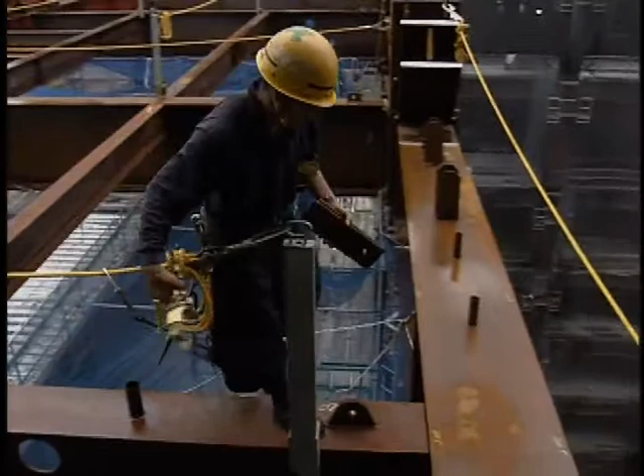They seem to defy gravity. Forged from concrete and steel, skyscrapers loom over today's urban jungle. They embody the souls of those who built them, the strength and courage of high steel workers, but also the danger of such a passion. For as gracefully as they rise, skyscrapers collapse with unparalleled devastation.

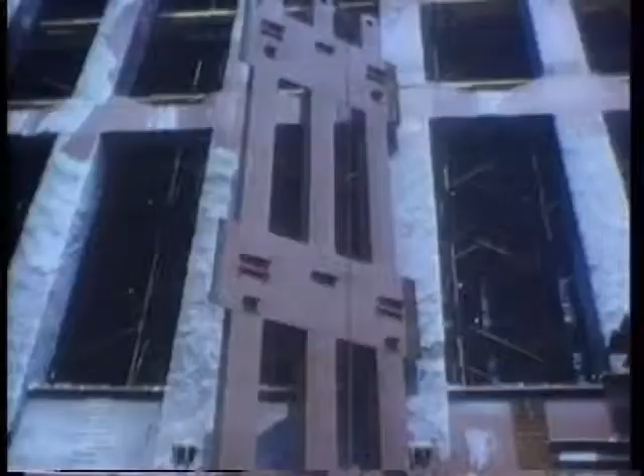Yet in the face of potential disaster, architects continue to design these superstructures higher and higher. It's become a race towards the heavens to lay claim to the title, tallest building in the world. How far and how high will this never-ending race take us? And what engineering marvels keep these superstructures standing?

In Nagoya, Japan, despite continual rainstorms, work progresses on one of the world's largest skyscrapers. The JR Central Towers, still in its infancy, is being built in the middle of a crowded city and on top of a busy train station. Every facet of modern engineering skill is daily put to the test.

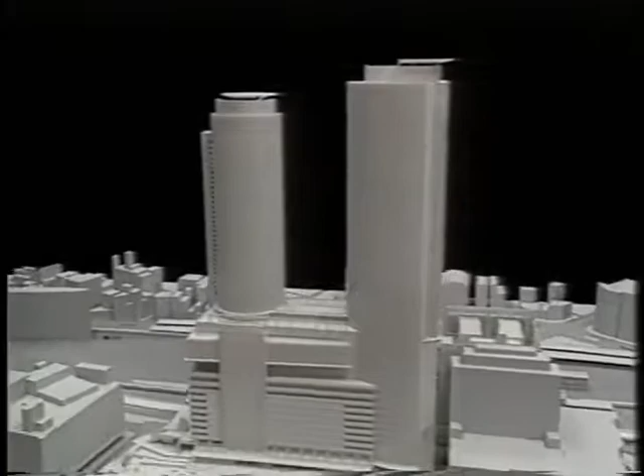When completed, this enormous skyscraper will encompass over 4.5 million square feet. It's about the size of the Pentagon, or larger than one tower of the World Trade Towers, the Twin Towers, and one of the largest buildings in Japan, if not the world. Engineers in Nagoya, like many throughout Japan, have no choice but to build up. Land is scarce, and real estate prices are soaring. To meet the needs of a growing population, skyscrapers are the only answer.

In the capital of Malaysia, space isn't an issue. Land for construction abounds. Yet in Kuala Lumpur, a modern 1,400-foot skyscraper is being built. The Petronas Towers are an amazing structure of glass and steel. With 88 floors and 100-foot spires, these twin towers are a monument to architect Cesar Pelli's dreams.

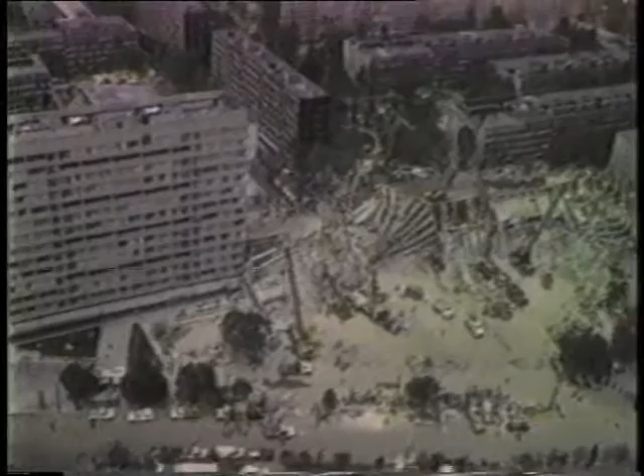Whether built out of need or inspiration, constructing these mammoth skyscrapers relies heavily upon technological advances. But modern science isn't perfect, and tragedy follows when one comes tumbling down. Unwavering before such catastrophes, engineers continue to build bigger and taller superstructures.

Well, I think man has always wanted to get higher and higher. He always climbed the mountain to see beyond. It's also getting up to be taller, to overlook everyone else, or to be recognized, or to feel more powerful.

To build these modern-day monoliths, architects and engineers first had to conquer the force of gravity. During the mid-1800s, the only means of vertical transportation, other than climbing stairs, was a rope and pulley system driven by a steam engine. However, the system was too dangerous for passengers since the ropes often broke.

Frustrated, Elisha Otis invented a safety brake that locks the platform to its guides. In 1852, what seems a minor invention paves the way for the modern elevator. Slowly, the public begins to trust the Otis elevator. Upper-level floors become fashionable and profitable as architects quickly adopt this new means of vertical transportation.

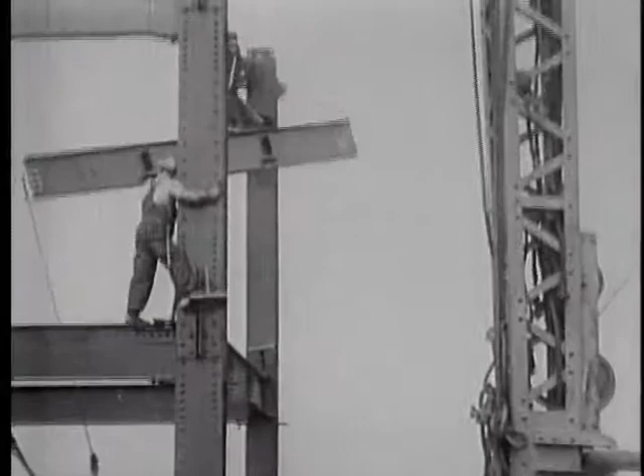Even with the use of an elevator, buildings rising above 200 feet remain a dream. The building materials of the day, bricks, stones, and mortar, are simply too heavy to allow great heights. But in 1885, with the invention of the steel cage structure, the modern skyscraper is born.

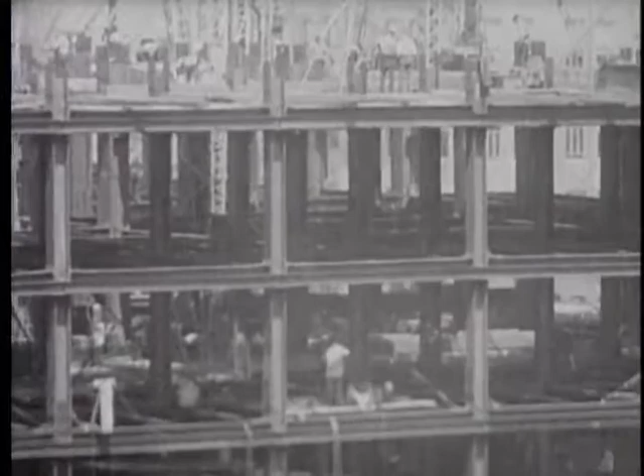Rather than build up from the ground, they built a cage inside, like a bone structure, a skeleton, and then they put the skin on the outside. The weight of that material is held at each floor level rather than passed all the way down 5, 10, 20, 30 stories to the ground and held at the bottom floor. No, it's all hung off of this very strong structural cage, which is much lighter now because it's made of steel.

Because the steel structure bears the majority of the weight, the exterior, or skin of the building, can now be made of much lighter materials, such as glass and aluminum. The result is an explosion of buildings taller than anyone has ever seen.

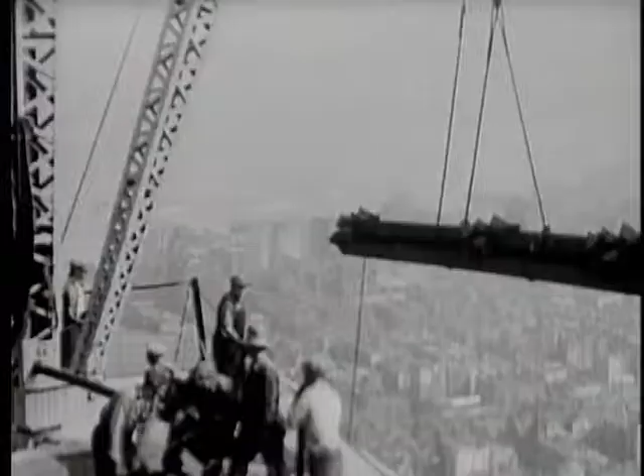The limits on masonry buildings were about 200 to 250 feet, equivalent to about 20 stories. With the advent of the separation of the two systems, the skeleton from the skin, we became capable of pushing higher and much higher, up to 50, 70, 80, or the Empire State Building type, up to 100.

For over 100 years, the steel cage structure has enabled engineers to build skyscrapers higher and higher. It's the backbone of every tall building's design, even the 800-foot JR Central Towers in Nagoya.

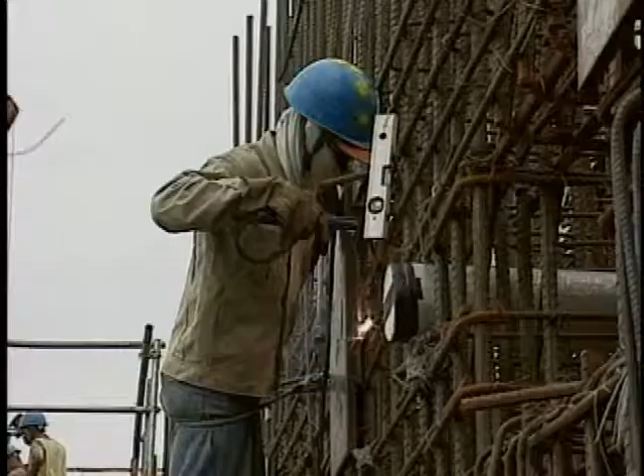The skyscraper is made up of 3 steel cages. One forms the base of the building, while 2 rise up within each tower. Without this technology, skyscrapers rising above 20 stories wouldn't be possible.

In Malaysia, over 26,000 tons of steel and 160,000 cubic meters of concrete have been used in the framing of the Twin Towers. These 88-story steel and concrete skeletons will help the Petronas Towers claim the title, tallest building in the world.

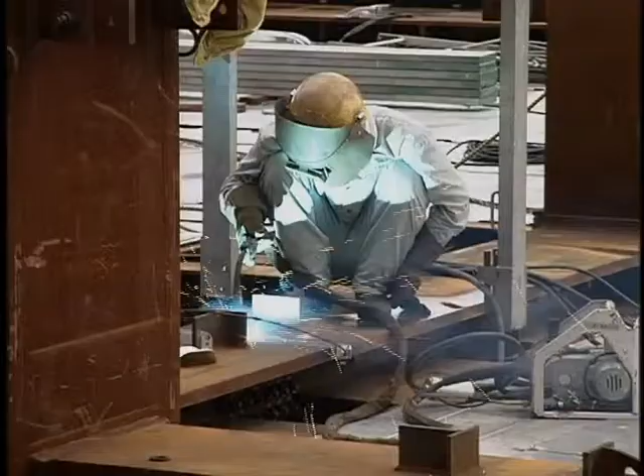Higher and higher they rise. But at what altitude do skyscrapers become too dangerous? Over 50 years ago, a deadly incident magnified these risks.

In 1945, the tallest building in the world is New York's Empire State Building, rising an incredible 1,250 feet. Built in just over 13 months, its claim as the tallest skyscraper will last nearly 40 years. Perhaps this building's greatest achievement is not its long stay at the top, but its jarring reminder of the dangers of building so high.

The Empire State Building and all New York City were wrapped in fog as a B-25 Mitchell bomber trying to reach a nearby airport crashed into the tallest structure in the world. Although the pilot and 13 others died, the building sustained little damage and was open for business 2 days later.

Its ability to survive a collision with a World War II bomber seemed to validate modern engineering technology. Soon, a skyscraper building boom swept across the United States.

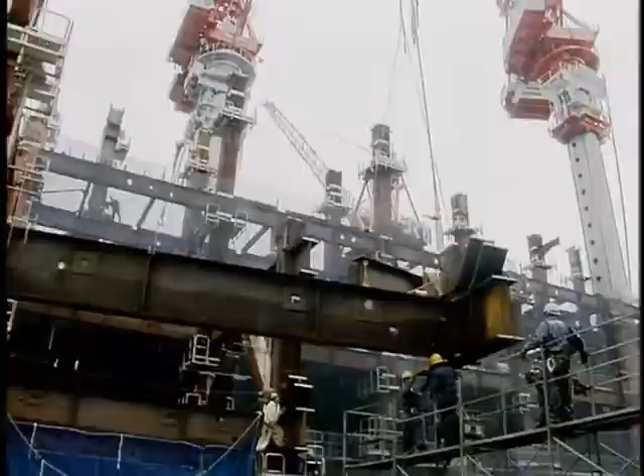The competition is as fierce as ever. You built a skyscraper, they're taller and taller. Some of them make absolutely no economic sense, but they're being built nonetheless. It's just amazing the number of projects that are being done out there. They're being done strictly for ego. There's no other reason, and there's no economic reason for them to be built other than sheer ego.

As this construction craze of enormous skyscrapers spreads throughout the Pacific Rim, the engineering world is once again thrown into a battle to become the world's tallest building.

The Petronas Towers are planned to top off at 1,476 feet, 22 feet taller than the Sears Tower. Only time will tell if this architectural pursuit will prove deadly.

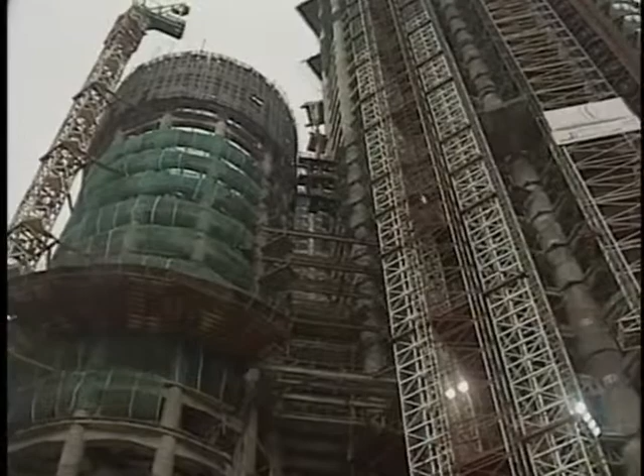In New York, to avoid future collisions, airplanes were simply rerouted. But the engineers of the JR Central Towers and the Petronas Towers are threatened by unavoidable forces.

They're building skyscrapers in one of the most seismically active regions in the world, where the threat of a major earthquake is constant.

Relying on the innovative designs that enabled the Sears Tower and the Empire State Building to reach such monumental heights won't help. They weren't designed with earthquakes in mind.

How safe will these new structures be when a violent earthquake shakes their very foundations?

As construction continues on the JR Central Towers, the Petronas Towers nears completion. Engineers of both buildings hope their state-of-the-art technology will pass the test.

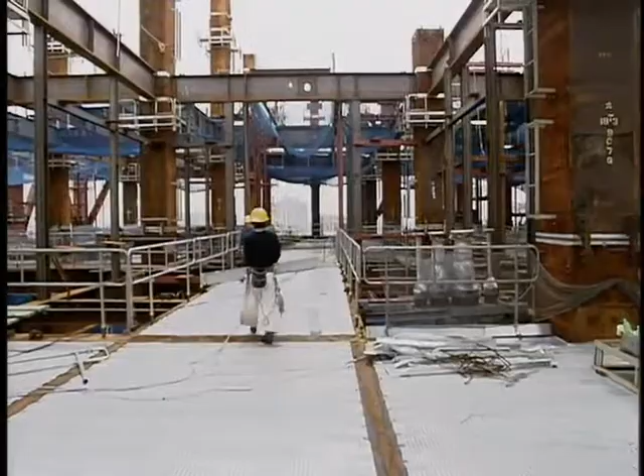If it fails, these latest additions to the tallest buildings in the world could come tumbling down. Modern building design will be pushed to its limits when Mother Nature strikes.

The construction of the JR Central Towers is a collaboration of the top engineering minds in both Japan and the United States. It's also one of the most hazardous projects in the world.

Located directly below the site is Nagoya Station. 1.5 million people pass through here each day, disregarding the huge skyscraper being built above them. But what would happen if an earthquake hit such a densely populated area? It's happened before.

September 19th, 1985. A killer earthquake registering 8.0 on the Richter scale rocks Mexico City.

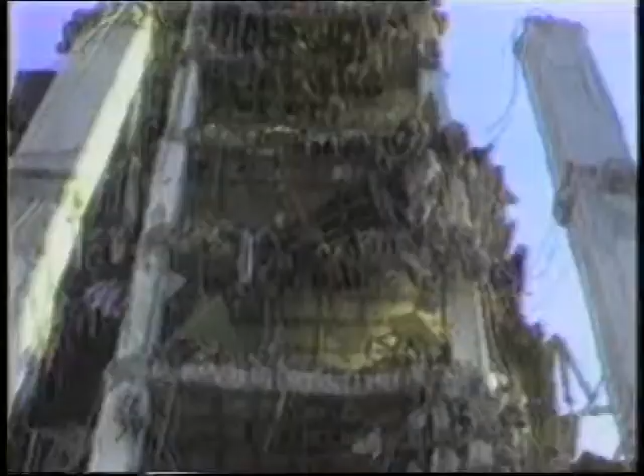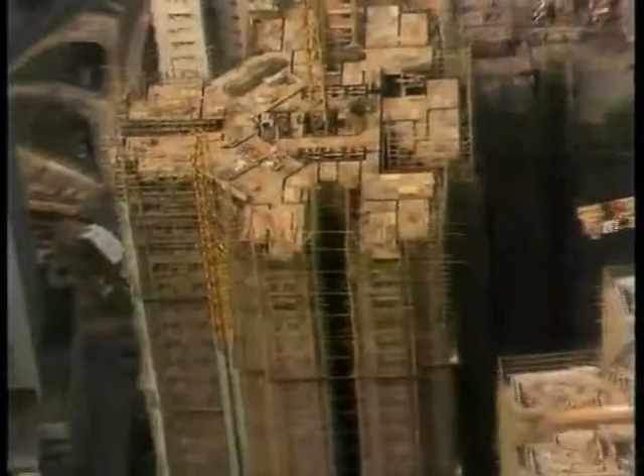More than 10,000 people are killed, and over 100,000 are left homeless as the quake damages nearly 3,000 structures. 400 totally collapse. And for the city's towering skyscrapers, once a symbol of modern Mexico, this is the most devastating quake ever.

The ground was actually moving back and forth for a minute and a half or so, about like this. It was just a gentle motion back and forth. And certainly most buildings, if you were in them, you'd get a little seasick, but you wouldn't feel very much. It's not a very violent motion unless you happen to be a tall building.

During the 90 seconds of shaking in Mexico City, some skyscrapers swayed 6 feet, 3 times farther than what is considered safe. Neighboring buildings slammed into each other, causing major damage.

10 years later, a small office in the Japanese city of Kobe is tossed upside down, just one of the many casualties in a town devastated by a 7.2 earthquake.

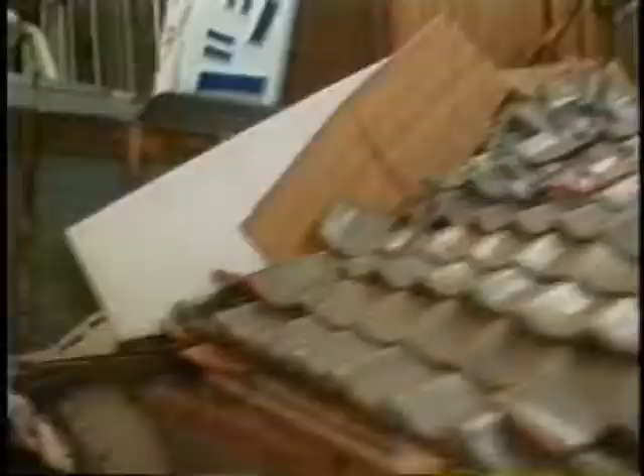Over 100,000 buildings are destroyed. Another 80,000 are severely damaged. And in downtown Kobe, home to most of the city's skyscrapers, 60% of the buildings sustain significant structural damage. Over 20% are completely destroyed.

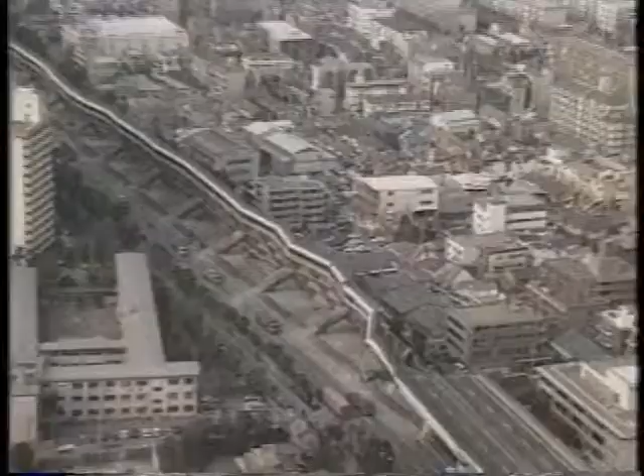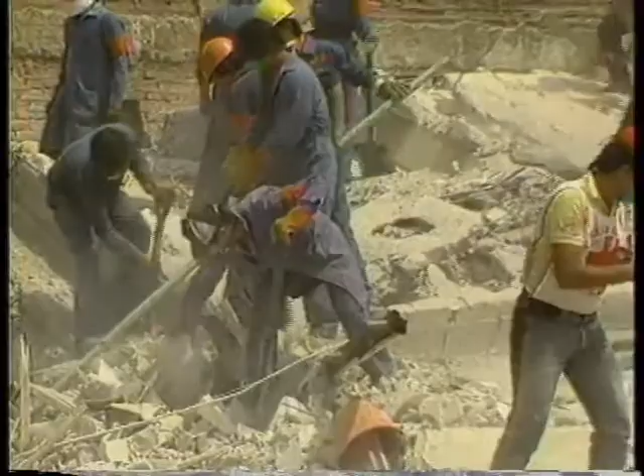It's in this seismic environment the latest skyscraper building boom has erupted. Whether guided by sheer need or pure ego, architects are designing some of the tallest buildings in the world on some of the most unstable land. But the devastating failures in both Mexico City and Kobe have provided the building community with valuable insights.

When the Earth moves beneath these monoliths, the skyscraper's center of gravity becomes offset. The top of the building tends to lag behind the base, putting more stress on the columns. At the very least, the building could end up with a permanent bend in it, yielding an economic total loss, although the occupants may survive. The worst case would be that it got so far out of vertical that it actually fell over, and that, of course, would be a catastrophic situation.

Using computers to simulate the shaking a building sustains during a major earthquake, researchers discovered that strengthening a skyscraper's foundation may prevent these structural failures. In Nagoya, Japan, only 140 miles from Kobe, the engineers of the JR Central Towers are putting this latest research to the test.

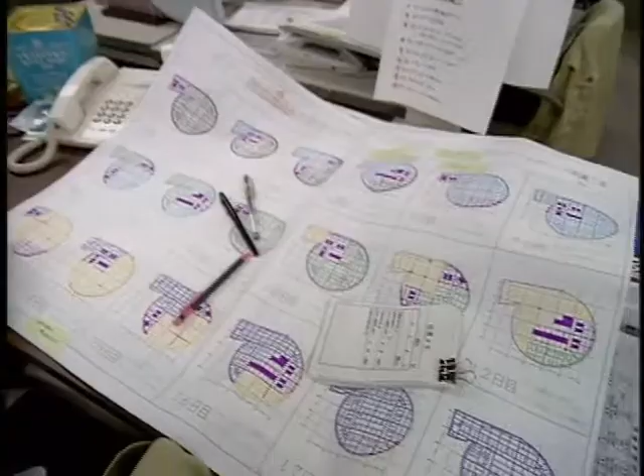4 stories below the proposed lobby, a vast digging campaign is underway. In this subterranean cavern, architect Paul Katz hopes to build the strongest foundation ever constructed for a skyscraper.

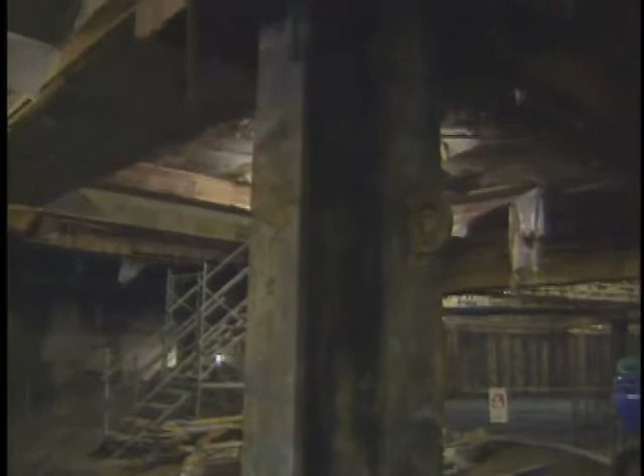To anchor the building to the foundation, engineers drive 125-foot-high steel beams 60 feet into the bedrock. Eventually, these columns will be encased in steel reinforcement bars and concrete. This will become the base frame of the building and bear the majority of its weight.

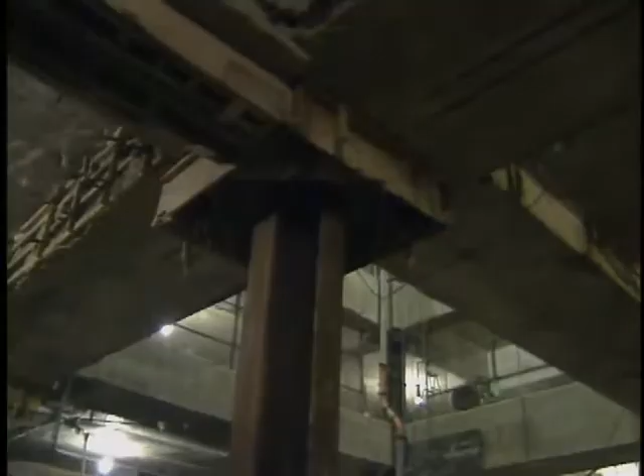You can see here the tremendous amount of reinforcement that is needed not only to carry the weight of the building, but this is where all the forces of the building come down, and in earthquakes this is the part of the building that resists the lateral shaking that an earthquake will affect on a huge structure like this.

As an added precaution, engineers will then fill the entire cavern with over 1.5 million cubic feet of concrete, creating what is called a mat slab foundation.

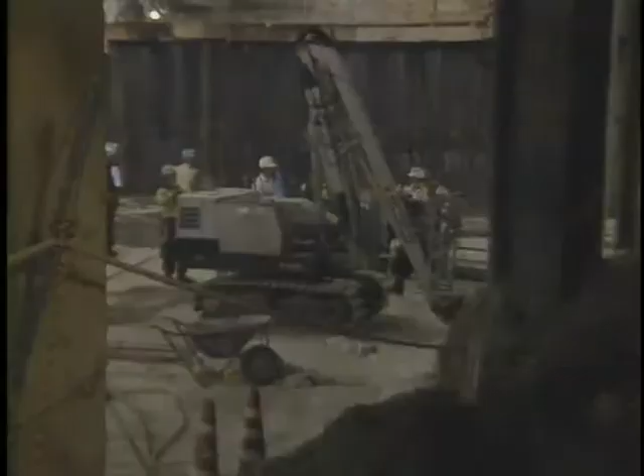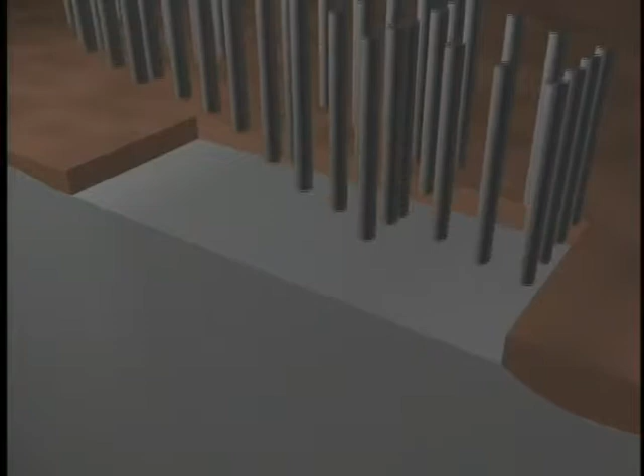What we're seeing in the excavation here is entirely going to be filled with concrete, 5.5 meters in height, which in a way the whole building then floats on, helping support the building from tilting and unifying the entire building. For a mat slab foundation to work, steel piles must be anchored in solid bedrock.

Once in place, they're locked together into a stronger structure by the cement slab poured around them. Finally, the steel structure of the skyscraper above ground is bolted to the foundation piles below. This becomes the skyscraper's skeleton, a single rigid structure anchored by a cement slab able to absorb most of an earthquake's lateral force.

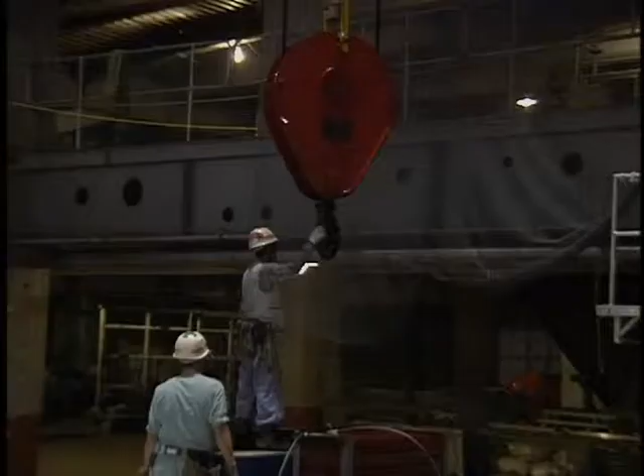The mat slab foundation prevents the steel cage structure above ground from swaying too far during an earthquake. The taller the building, the larger the foundation necessary. Because of the limited space surrounding the skyscraper, the JR Central Towers foundation is forced to be excavated in an underground cavern, while the Petronas Towers foundation will spread out, covering over 1.5 acres.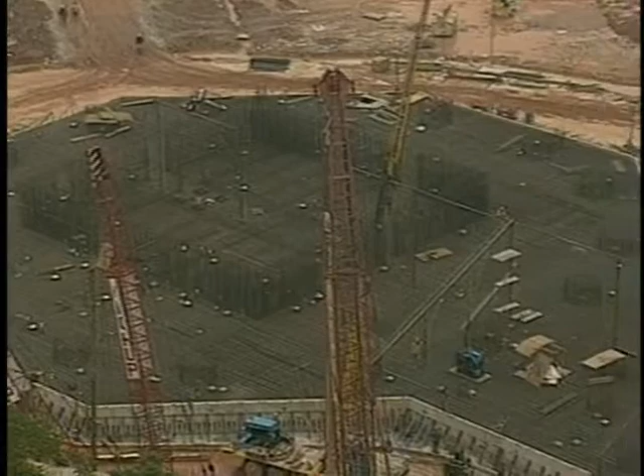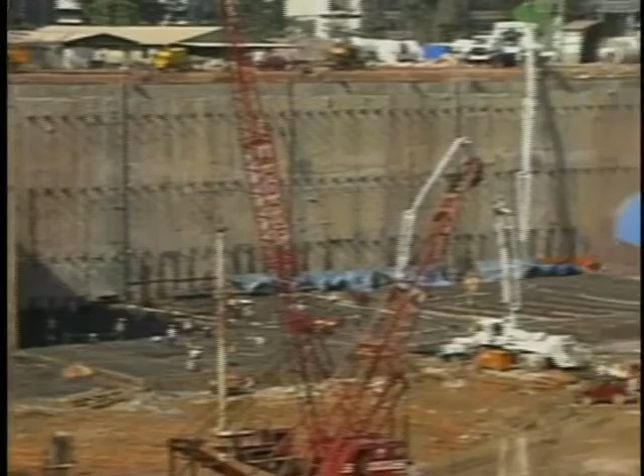The building that will become the tallest skyscraper in the world requires one of the largest mat slab foundations ever constructed. Before a drop of concrete is poured, the bedrock at the proposed site of the twin giants becomes an issue of concern for architect Cesar Pelli.

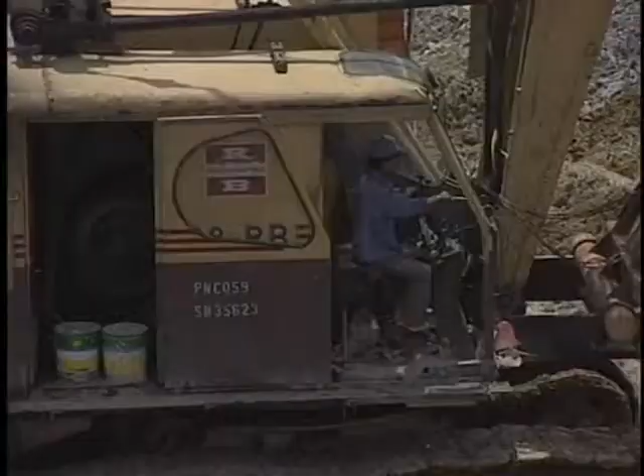You need to go down to bedrock, and you had to go very deep to start finding limestone. And the limestone that we found was like Swiss cheese. This fissured limestone requires drilling the building's foundation piles extraordinarily deep, over 400 feet underground, or more than 6 times the depth needed to build the JR Central Towers.

Once the foundation piles are in, over 70,000 tons of concrete are cast into the mat slab. Pouring round the clock, the work continues for 3 straight days. This was the largest single pour of concrete ever done.

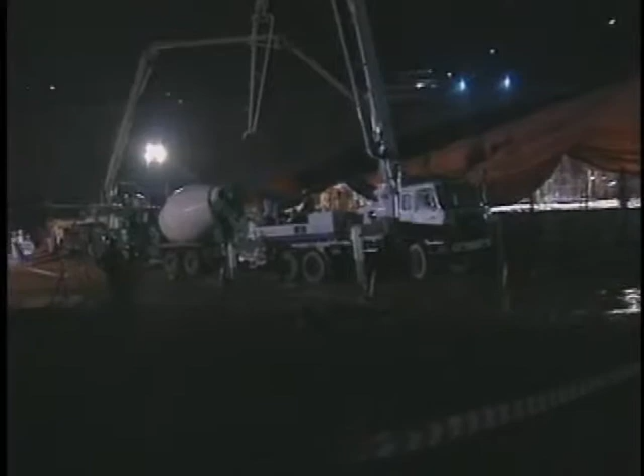Timing and precision of the pour must be perfect. If one side of the foundation were to dry and settle before the entire job is completed, an uneven base would result. If the skyscraper were built on an uneven base, the building's weight distribution would be uneven. Out of balance, an earthquake could easily bring it tumbling down.

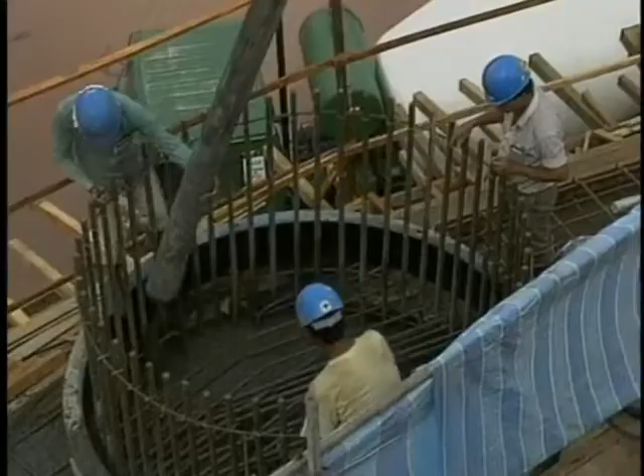But will these enormous mat slab foundations safeguard the buildings during a major earthquake? Or could they still topple to the ground, as in Mexico City and Kobe?

Eventually we'll see an earthquake in a major city that's a very large earthquake, and I think the bad news is that we could see some severe unanticipated damage and perhaps even collapse of some tall buildings.

The JR Central Towers, soon to be Japan's tallest building, is designed to withstand a magnitude 8.0 earthquake. Its engineers believe the skyscraper is safe, built to withstand the types of earthquakes that frequently strike the island nation.

A similar faith in building design has guided engineers in Los Angeles for years. And on January 17, 1994, when a magnitude 6.8 earthquake strikes Southern California, their faith is shattered.

In some areas, engineering fails and structures crumble. Amazingly, none of LA's skyscrapers collapsed. But an inspection of their inner steel cage frames reveals major damage in the welds connecting the vertical columns of many buildings to their horizontal beams.

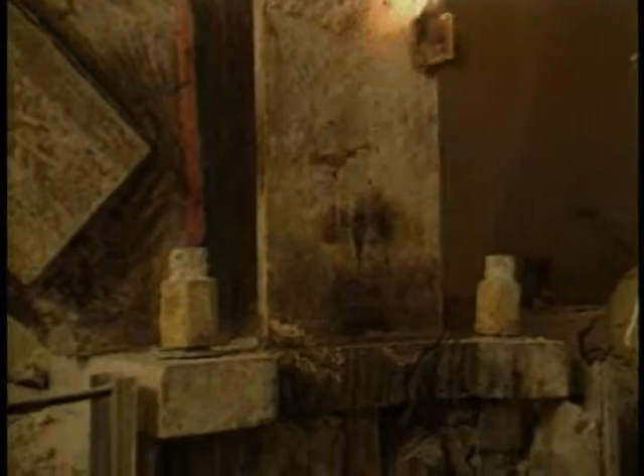The cracks did not only remain in the body of the weld that connected the two pieces. Once it started, it propagated. That crack had a zipper effect. It went right through the main body of the column element, and it ruptured the column horizontally.

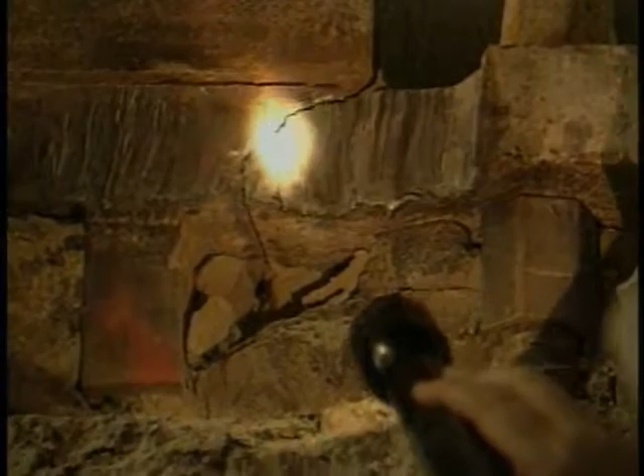Luckily, the Northridge quake was short, only 20 seconds. Laboratory tests show that had the shaking lasted as long as either Mexico City or Kobe, these cracked beams would have ruptured completely, causing structural failure in many of these buildings.

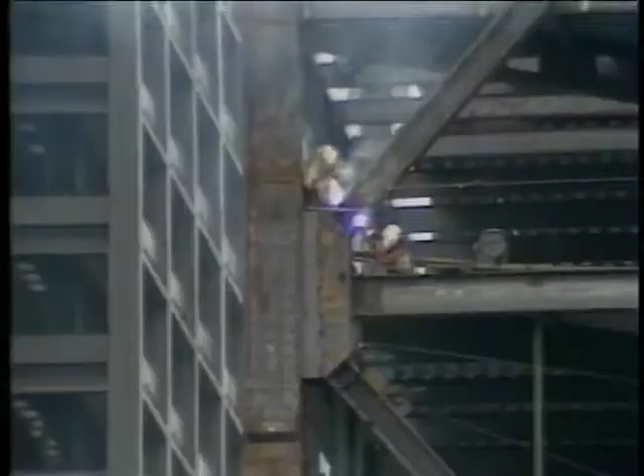While Los Angeles struggles to repair its damaged skyscrapers, the sobering news has sent shockwaves throughout the engineering world. The steel cage structure, once thought safe, is now vulnerable during a strong earthquake.

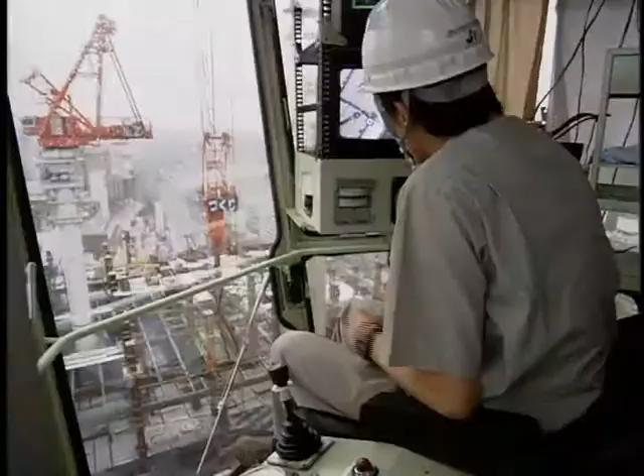Engineers of the JR Central Towers and the Petronas Towers must now implement the latest technology to keep their skyscrapers upright, to safeguard the millions of people who use Nagoya Station under the JR Central Towers, and to keep the Petronas Towers as the tallest building in the world.

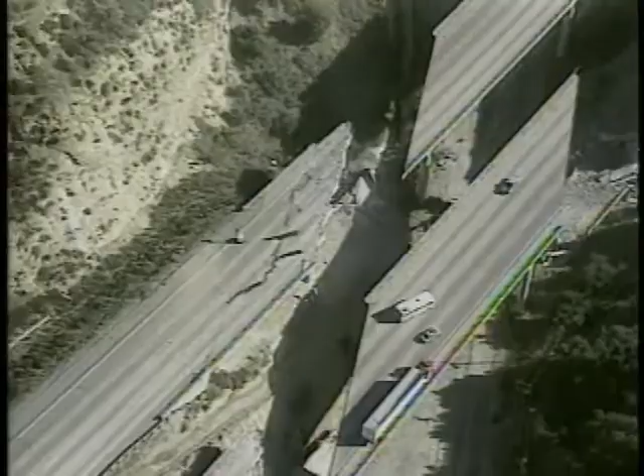In the aftermath of the Northridge earthquake in Southern California, tall building engineers have answered a troubling question. After years of research, a possible solution exists for the stress-induced failures that many buildings sustain during earthquakes.

Skyscrapers all over the world, including the JR Central Towers in Nagoya, now use what's known as dampers. These devices, installed within the diagonal trusses of the steel cage structure, reduce the building's shaking during a quake, much like shock absorbers in a car.

If you put a brace diagonally across it, as you deform the frame, that element would shorten and lengthen. And so if in that brace you actually put a damper, some sort of hydraulic valve, then it would absorb energy as it lengthened and shortened.

A skyscraper with dampers can absorb up to 3 times more energy produced by an earthquake than a building without them. The longer a quake lasts, the more effective a damper can be, absorbing more energy with each shock wave.

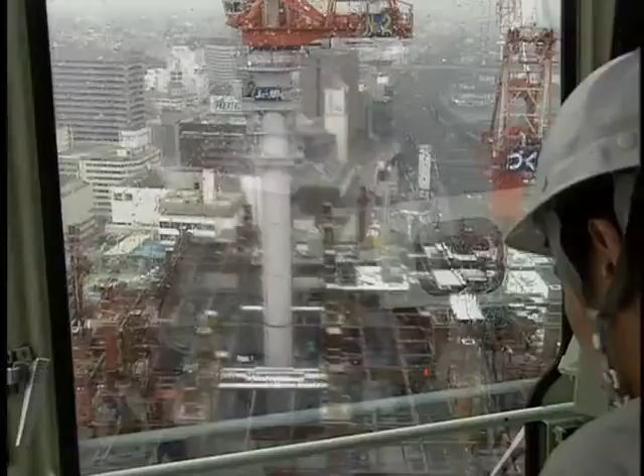Tall building engineers have been quick to adopt the damper technology. 14 have been installed within Petronas Twin Towers, and 6 are being installed in the JR Central Towers.

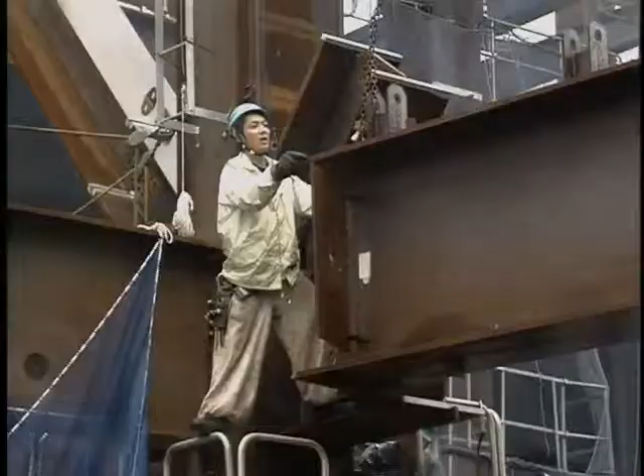While engineers in Nagoya and Kuala Lumpur incorporate technology to combat potentially destructive earthquakes, another, more immediate danger swirls above. The wind affects all skyscrapers. The taller a building rises, the stronger the wind it faces.

Skyscraper design must take into account these turbulent forces. Towering over 1,400 feet above Chicago, the Sears Tower sustains daily gusts that can average 75 miles per hour.

The wind force, by and large, dominates these very tall buildings, dominates the design. It's more important than the weight of the building in the sense of just holding it up. It is the dominant force. The wind is what drives the design of very tall buildings.

When wind hits a building, it acts much like the sail of a boat. In order to withstand these blustery forces, a tall building must be flexible enough to bend and absorb some of the wind, while still remaining rigid enough not to topple over, or even snap in half.

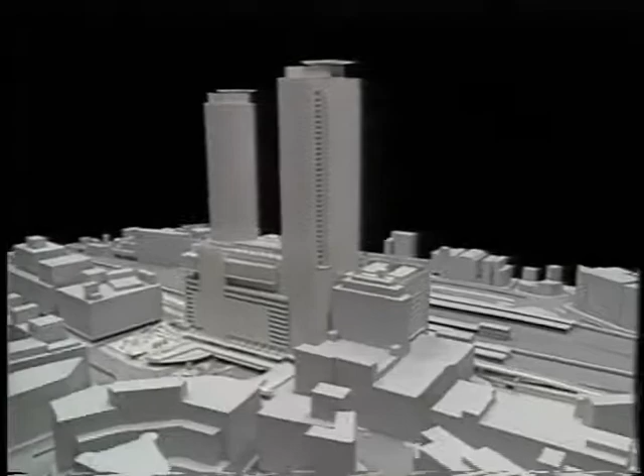The JR Central Towers provides a model of how this balance is achieved. The 3 inner steel cages provide flexibility, allowing the towers to sway up to 4.5 feet in strong winds, while the rigid central core of reinforced concrete adds the stability needed to prevent the tower from snapping in winds gusting up to 175 miles per hour.

However, as skyscrapers are built higher and higher, they encounter stronger winds and are required to sway even farther to remain upright.

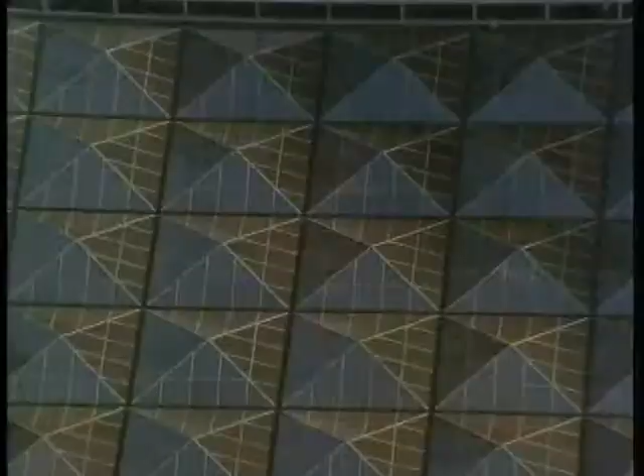Architects must now deal with a whole new design problem. It's going to wobble like a tuning fork in order to maintain its structural integrity under those forces.

So the question now is a more difficult one. It's not artistic, it's not properly scientific, it's judgmental, and it's about human comfort. It's about, on those top floors, how much vibration can people in offices tolerate and be comfortable with? At what point do we need someone at the elevator vestibule at the top handing out Dramamine?

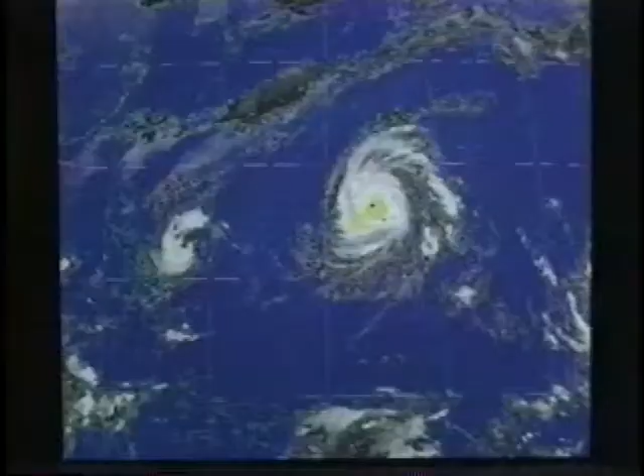If a swaying skyscraper can cause motion sickness in average high wind conditions, then the occupants of the Petronas Towers had better prepare for a wild ride. Reaching nearly 1,500 feet, the Twin Towers are designed to withstand the devastating winds that strike the region. These swirling gusts can reach over 90 miles per hour.

Already, the world record height of these towers has pushed modern technology to its limits. Each tower needs to sway almost 3 feet just to prevent a structural collapse.

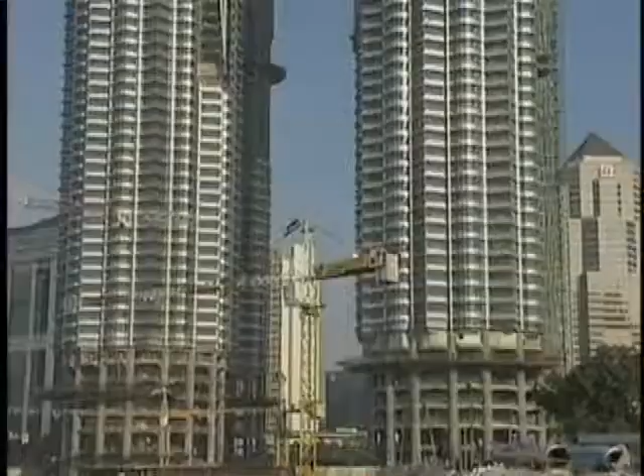But architect Cesar Pelli has a vision that will compound this problem: a bridge between the 2 towers, a structure that Pelli feels will be symbolic of something larger than the towers themselves, the human spirit. We proposed the bridge connecting the 2 towers at the 41st and 42nd floors. And the bridge with its supports marks a gate also to the sky.

Pelli's architectural vision clashed with the tower's physical reality. If each tower must sway independently, how can it do so while attached to the bridge? The realization of this dream will stretch both Pelli's and the engineer's skills to their limits.

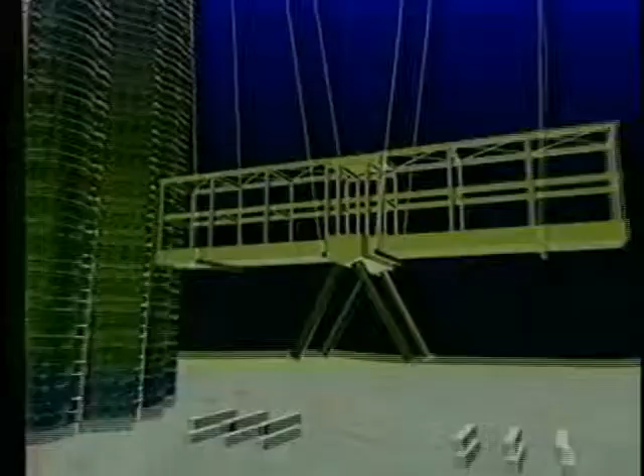It takes over 30 hours for construction crews to lift the sky bridge into position. But the real danger exists after the 900-ton passageway is locked in place.

What would happen if the swirling winds hit the twin towers from different angles simultaneously, and they swayed in different directions? The answer is frighteningly simple: the bridge will snap apart, plummeting over 600 feet onto a crowded walkway below.

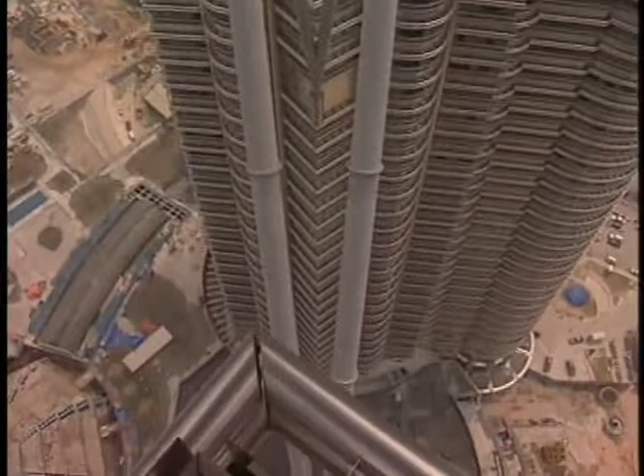To solve this unique design problem, engineers borrowed something from earthquake technology: dampers. Critical to the sky bridge's design are its two spherical support legs, 117 feet long and weighing 60 tons each. In essence, these two legs are enormous dampers that will help absorb the vibrations created when both buildings sway. To prevent these legs from snapping off when each tower sways in opposite directions, a torque reduction system is used.

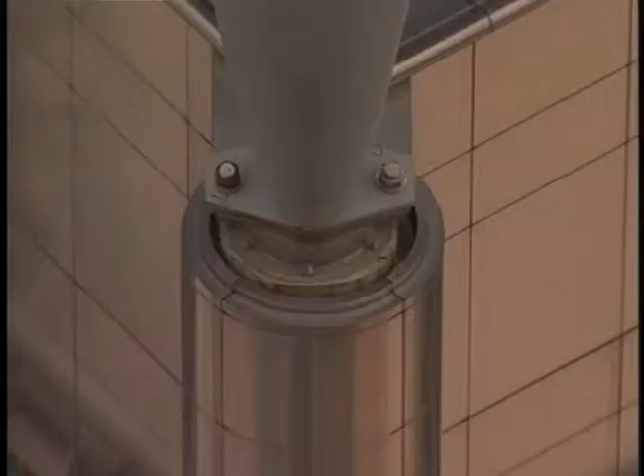Instead of anchoring them to the bridge and towers directly, the support legs are attached to a rotating plate that can twist at least 45 degrees in any direction. The result? The damper legs absorb the torque and sway, while the bridge's interior support system remains unaffected.

After the towers open, the bridge will serve not only as a passageway between the two towers, but also as an escape route in case of fires or emergencies. This combination of artistic design and engineering technology allows Pelli to realize his architectural dream. When I face that space between the towers, I am in direct contact with the sky, with a higher world.

Pelli was able to implement his design for the Petronas Towers. Sometimes the forces that can upset plans come from the most unexpected places. In Japan, where cable television hasn't taken root, most television signals are broadcast through the air.

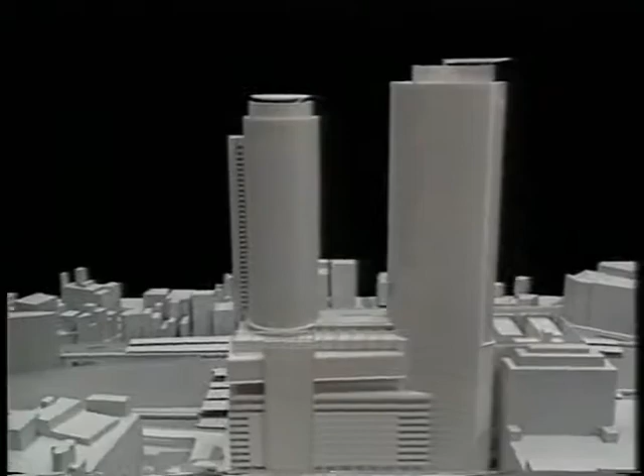The JR Central Towers, as they're being built today, are round. In the original plan, they were square. However, it became clear that a rectangular tower 800 feet in the air would block transmission signals from local TV stations. The result would be a phenomenon known as TV ghosting.

TV ghosting is a very common phenomenon. If you're looking at your television set and you get two images that blur your reception, that's called TV ghosting.

The architects of the JR Central Towers were surprised by this structural problem and forced to make a multi-million-dollar design change or suffer the wrath of thousands of television viewers. Those curves, from an aesthetic point of view, were very nice, but also from a technical point, what they do is take a direct wave and divert it.

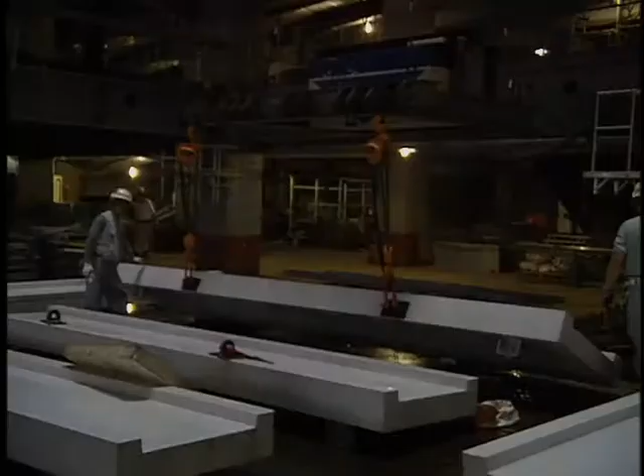For a building to divert a broadcast wave, the exterior can't contain any metal or reflective glass that would cause the wave to bounce back toward the transmission tower. So the exterior of the JR Central Towers had to be made of precast concrete and ceramic tile, a much heavier skin than the glass covering originally planned.

This extra weight on the frame of the skyscraper made it even more necessary to place a massive mat slab foundation underneath the building.

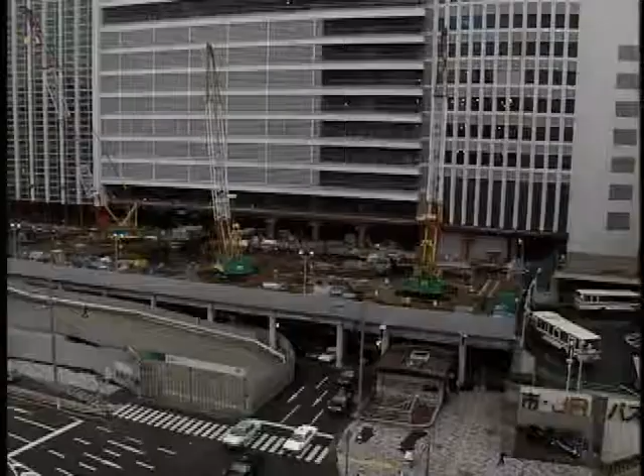In the end, the architects and engineers for both the JR Central Towers and the Petronas Towers are able to fulfill their visions. The 800-foot JR Central Towers will become the tallest building in Japan, providing desperately needed office and retail space to a growing metropolis. And the Petronas Tower will win the title, tallest building in the world.

But have these engineers, while building such enormous skyscrapers, prepared for every disaster? Or is it impossible for an architect to prepare for the insanity of man?

Designed to survive the battering of high winds and the violent shaking of earthquakes, modern skyscrapers seem indestructible. But where Mother Nature might fail, man has succeeded.

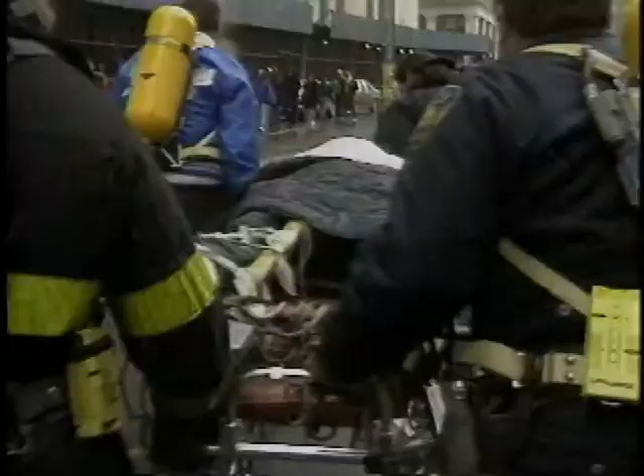On February 26, 1993, a nightmare becomes a reality. The bombing of New York's World Trade Center ushers in a dark new reality. The threat of terrorism has finally come home. The blast kills 6 people, injures over 1,000, and causes millions of dollars worth of damage.

But as enormous as the force of the explosion is, it doesn't bring down the towers or even cause severe damage to the structure of the building.

You must understand that the towers were designed for the impacting of the largest airplane of its time, the Intercontinental 707 aircraft, right into the building.

In designing the World Trade Towers to withstand a mid-air collision, engineers learned after the bombing that they had inadvertently built a fire trap.

Both towers actually behaved like giant chimneys, and they took this air that was in the basement created by this great explosion and sucked it up into the towers and raised it up through, trying to expel it at the top.

Somewhere among 110 stories, 50,000 people are stranded in complete darkness. When emergency systems fail, smoke fills the towers and people become desperate for air. They smash windows in a frantic search for a way out.

Yet they're alive because the tower didn't collapse. The steel cage skeleton absorbed the force of the bomb and prevented its collapse by distributing the blast shock throughout the entire frame. However, the inner concrete reinforced columns, designed to give the towers their rigidity, became the vertical conduits for the deadly fire and smoke.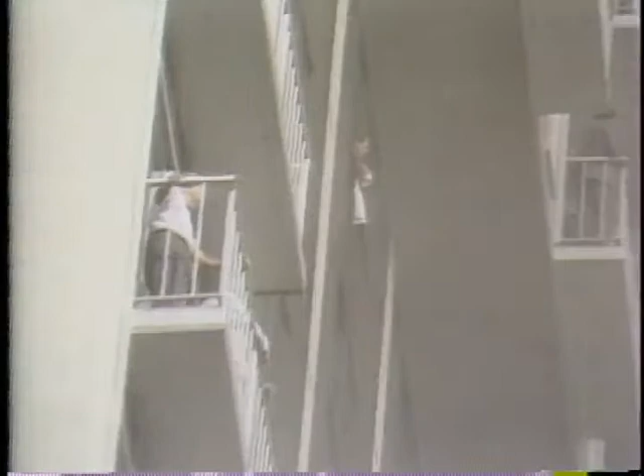Engineers are now challenged with developing an advanced infrastructure to ensure that the air, water, and fire systems can function under extreme situations. Once again, as architects continue to design skyscrapers higher and higher, engineers struggle to invent new systems to support these record heights.

For the engineers of the Petronas Towers, simply providing water to the entire building becomes their biggest obstacle. Over 600 pounds of pressure will be needed to pump water to the pinnacle of this skyscraper, nearly 1,500 feet into the sky. Simply attaching a faucet or sprinkler to such highly pressurized water would be like trying to drink from the end of a firefighter's hose.

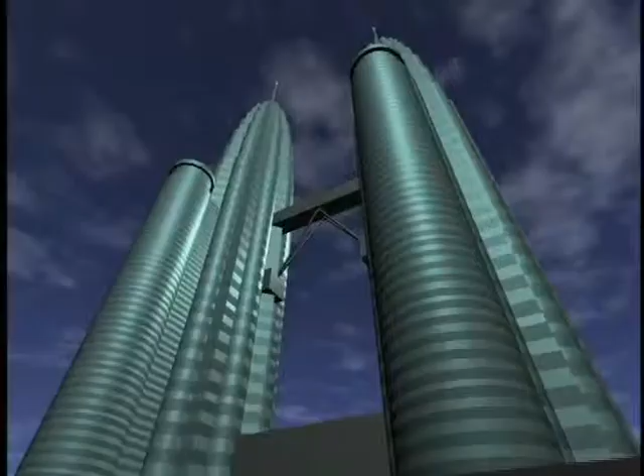To solve this problem, engineers decide to pump water to the very top of the building and then let it cascade down to pumps located in the maintenance floors below, losing its pressure as it trickles down. At each floor, the water is then distributed throughout the tower.

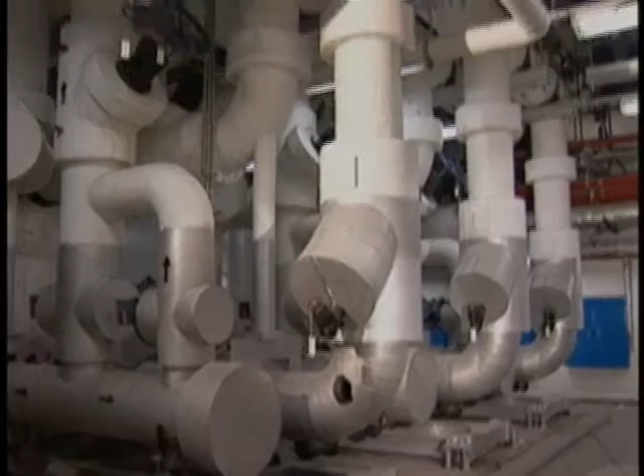In order to achieve this, 3 entire floors within each tower are dedicated solely to maintenance systems. Located at the 7th, 43rd, and 81st floors, these control areas handle the water, air, and electrical distribution for the floors attached to their zone.

If during a fire or explosion one of these maintenance floors is destroyed, the other 2 can operate independently to suppress any fire and ventilate any smoke.

During the World Trade Center bombing, once the main control area was knocked offline by the blast, all emergency systems throughout the skyscraper were lost. The 3 independent control areas in the Petronas Towers are designed to avoid just such a fate.

This decentralized plan provides a reliable means to a more comfortable environment for the tenants. You know, you take it for granted that you're cool, you're warm, there's lights on, the bathrooms work, and there's some very, very sophisticated systems in your building, particularly today.

These high-tech solutions to old problems have made possible the continued growth of modern skyscrapers. But this technology doesn't come cheap.

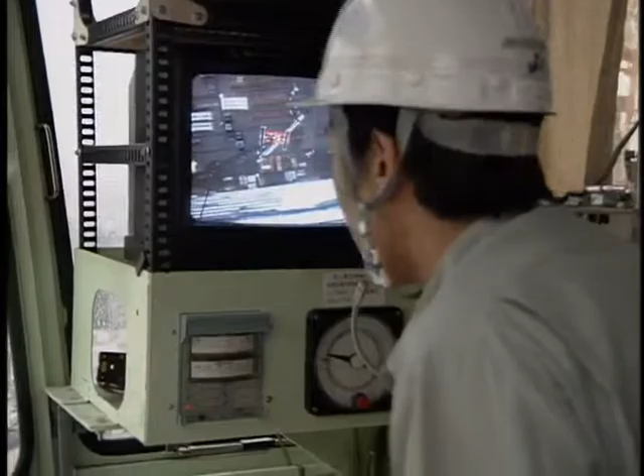In Nagoya, Japan, it will take 7 years to complete the JR Central Towers. And it's costing $1 million a day to build this skyscraper.

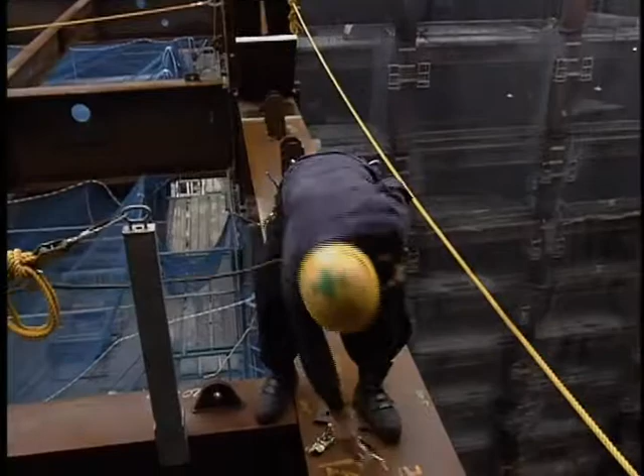But for all the money that's spent, it's the skill of the high steel worker that makes all skyscrapers possible. In Japan, the people who work on these tall buildings are some of the most talented and dedicated workers in the world.

At the JR Central Towers, the project is viewed as a team job. Each morning, workers perform calisthenics together. A detailed briefing of precisely what work needs to be completed that day follows. The coordination between departments is so precise that the day's work is planned down to the minute.

The skill of the worker in Japan is at a very high level. They devote their lives to the construction industry. This dedication has paid off for the JR Central Towers. Construction is on schedule and under budget, with workers completing an astonishing 3 floors per week.

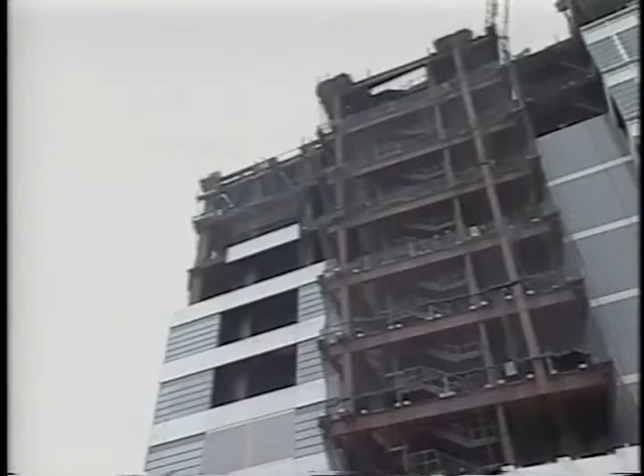Elsewhere around the world, the completion of 1 floor per week is acceptable. But for the many workers on the high steel in Nagoya, being average is not acceptable, and their passion is spreading.

Japanese engineers and workers often train crews building skyscrapers along the Pacific Rim. They came to Kuala Lumpur, and the results stand before all the world to see.

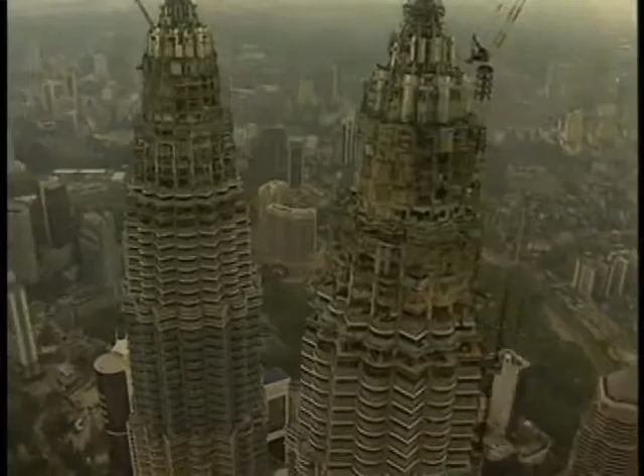Highly skilled workers, technological advances, the dreams of architects. These are the ingredients to build the modern skyscraper.

It's guided engineers to build the JR Central Towers 800 feet above a crowded metropolis in the heart of earthquake country. And it's inspired Cesar Pelli to design and erect the tallest building in the world as a monument to a proud city.

But in this race to reach new and unimaginable heights, how high is high enough? The drive to create the tallest skyscraper in the world has been a 100-year odyssey sweeping engineers and architects far beyond their initial dreams.

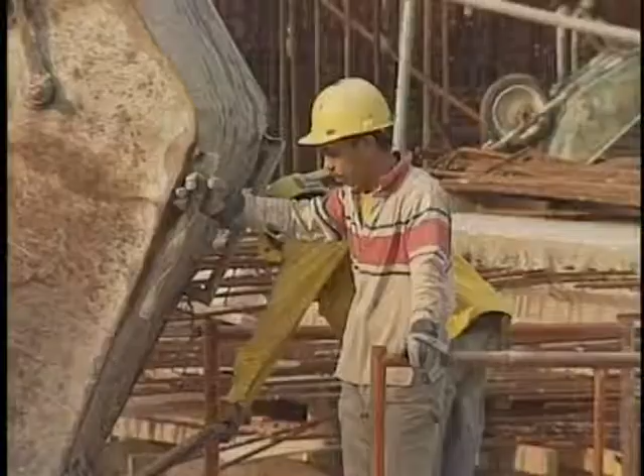This ambitious race has led Cesar Pelli and the engineers of the Petronas Towers to the forefront of modern building design. The $800 million invested by their builders have made the Petronas Towers the tallest building in the world. Their 88 floors soar 1,483 feet into the air.

Or is it? Engineers of the Sears Tower say their building still retains the title, since it has 110 floors to Petronas' 88. But Pelli's building includes an enormous spire that tops it off 22 feet higher than the Chicago skyscraper. Sears Tower officials counter that if Petronas' spire is counted, then the antennas on their skyscraper should be counted too,

which raise its height 231 feet taller than the Malaysian giant. Pelli argues that his spire is integral to the design of Petronas, and the Sears antennas are just that, antennas. But if the height to the tallest antenna is the standard, then isn't New York's World Trade Center the tallest building in the world at 1,758 feet?

This debate will become more intense very soon, because in Shanghai, ground has broken on the Mori Towers project. When finished, it will loom over this ancient Chinese city at a height of 1,509 feet, taller than both Sears and Petronas. In Hong Kong, Manila, and Tokyo, the city skylines are punctuated with buildings under construction. Is this where the next Petronas will rise?

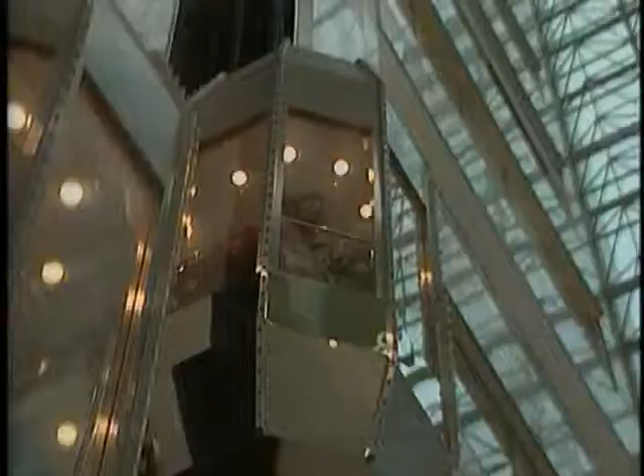The key to taller skyscrapers is once again the elevator. We took a 145-story building, put all the elevators in it that were needed by all the people in 3 million square feet that were to occupy that building. The entire floor plate would be taken up by the elevator core and there'd be no space to rent and make money on. So, hey, that wouldn't work, right?

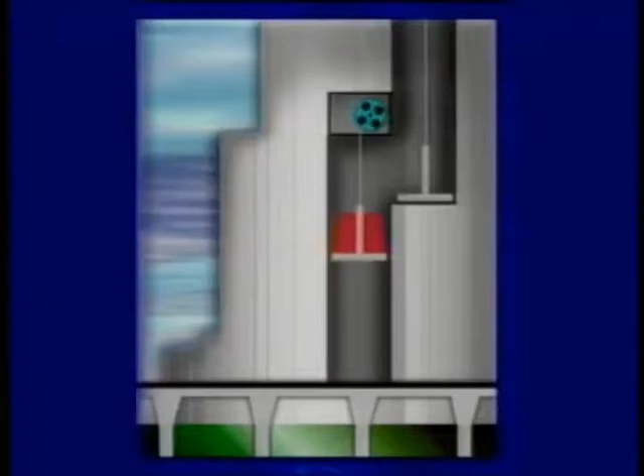Recently, the Otis Company announced its latest creation, which many believe will solve this dilemma: an elevator that can move horizontally as well as vertically. By providing access to more areas of a skyscraper with fewer elevators, valuable rental space is opened up.

Once a building becomes economically viable to investors, how long will it take before a higher one is built? And how long before another technological advancement comes along that raises tall buildings to unheard of heights? In Metropolis, filmmaker Fritz Lang's prophesizing drama of 1927, even the sky isn't insurmountable. But is there a physical boundary beyond which science can never advance?

Years ago, a mile-high building with atomic-powered elevators connecting over 528 floors was designed by American architect Frank Lloyd Wright. If built, a skyscraper this tall would stand over 3 times the height of today's tallest structures. 40 years ago, a mile-high building seemed a futuristic folly. But is it still?

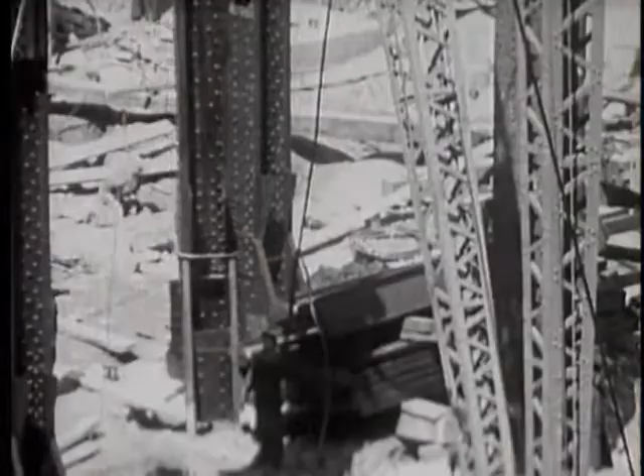As technology continues to advance, engineers now say a mile-high building is possible. New, lighter building materials are the key. Already, ceramics are being used in the exterior walls of the JR Central Towers to lighten the total weight of the building and reduce the stress on the earthquake-sensitive foundation.

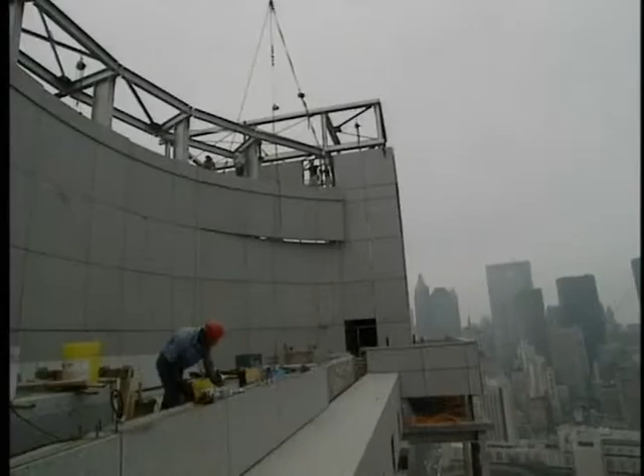The future is going to be, you do not limit yourself to natural materials like steel or aluminum or masonry, where you compose materials and create new properties out of hybrid materials, alloys or ceramics or plastics, carbon fibers, or mixes of all this.

Eventually, these new materials will give rise to skyscrapers taller than anyone has ever seen, surpassing both the JR Central Towers and the Petronas Towers, today's architectural marvels.

These monoliths of the future may also be closer to Lang's vision of the future. Not just a tower of office space, but self-contained cities within a building. Everything is in one building. You can have retail, hotel, office, apartments, and transportation, all in one single building. You can go to one location and get everything you want.

Since their earliest beginnings, skyscrapers have evoked unexplainable emotions in us, from pride to awe to fear. Have they evolved to become buildings that provide the space needed for a growing population, or just an exploitation of those needs? A justification to build what Cesar Pelli calls a gateway to the skies.

I do not know if it's innate in human beings or acquired culturally, but there is something magic and extraordinary about a structure that grows from the ground and moves up and reaches the sky. When you are up on a building, you and the ground are one. Somehow you feel, through your body, through your feet, through the structure of the building, that you are still rooted on the ground, but you are looking above all other buildings. And there is just something extraordinarily satisfying. I imagine the tallest oak in a forest or the tallest sequoia must feel the same thing.